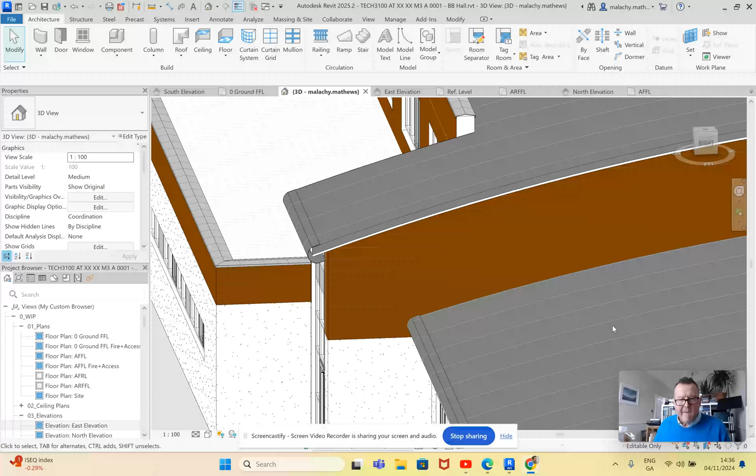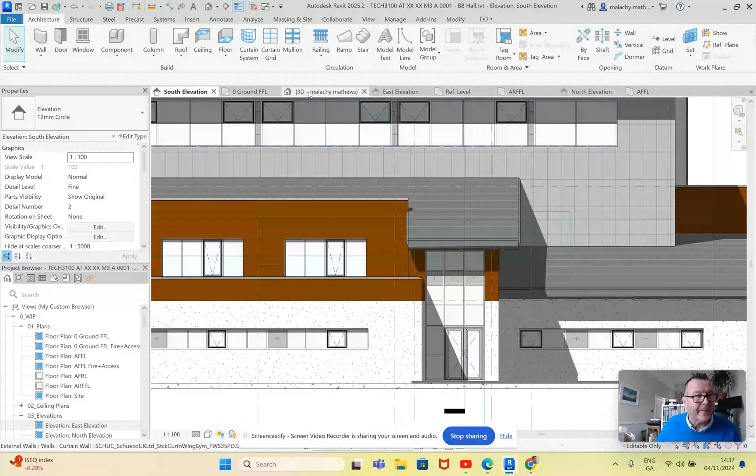So I talked about creating a circular fascia here. Now I'm not 100% convinced it's right, but it actually looks quite well on the south elevation. You get that kind of bump there, which I think is quite nice. And that's it there. Now I'm going to show you how I made that.

So I went in and created a new family using the metric profile template. Okay, let's see if we can get that rounded fascia. That's it there.

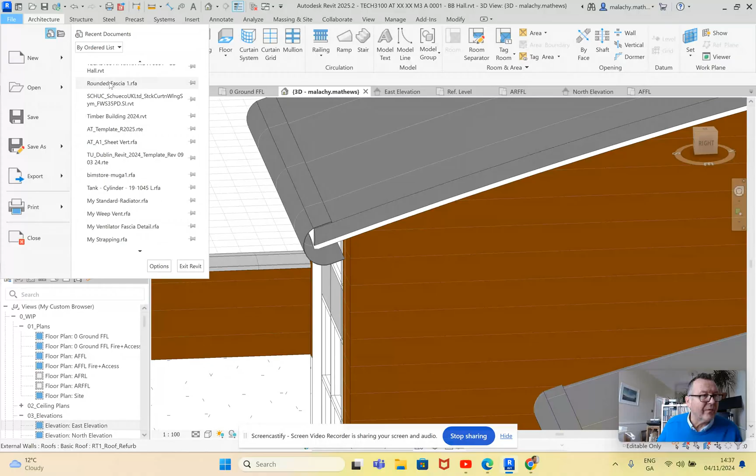So I use as my insertion point this, where the top of the roof is, that intersection there. So I kind of based it around that, drawing in that kind of shape there.

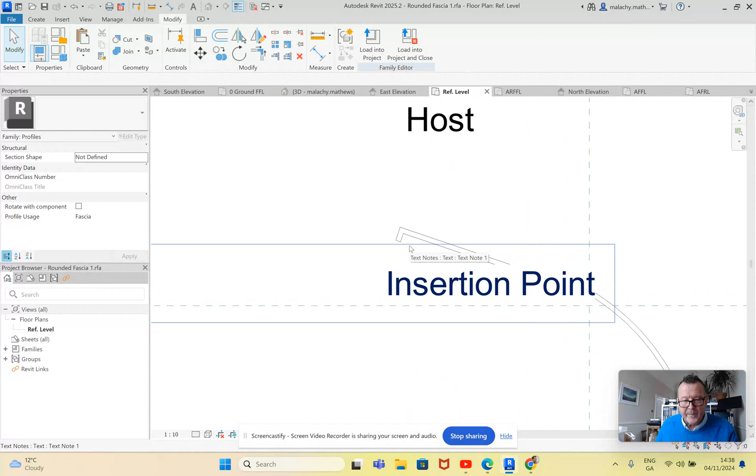And it has to be a polyline, so it has to start and finish. It can't be a single line, it's not like the roof extrusion. This one has to be a continuous line around, so that I've got a 5mm gap in between all of these here.

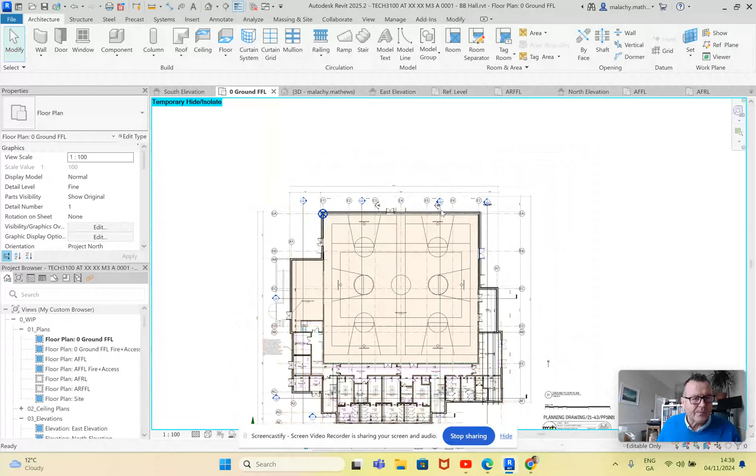And yeah, so how did I get that shape? I went into a section over here, and you can see in my green there, I kind of drew out the section first, and then got the rough shape that I wanted it to be.

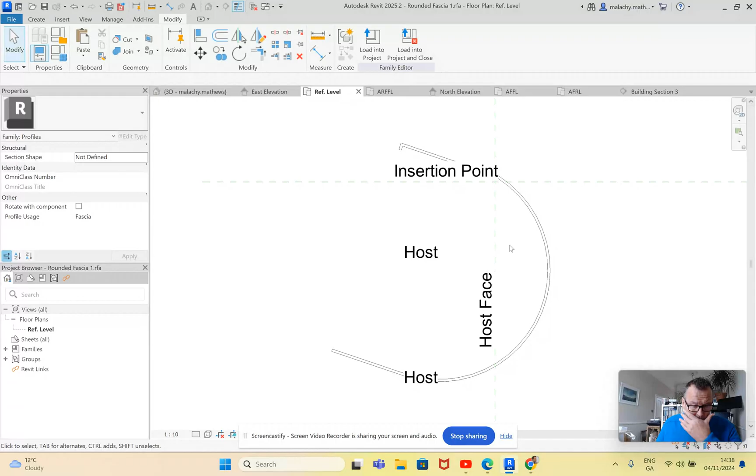I was able to cut and paste that line work into here. When I attached it first, it was the wrong way around, so I just came in and mirrored that. So that's the external, that's the internal, if you like.

The profile usage over here starts off with generic, but obviously I made it a fascia, so that it will be hosted by a roof as such.

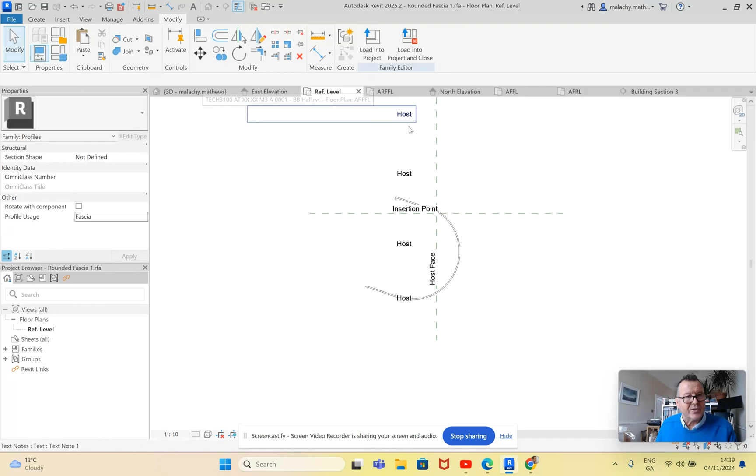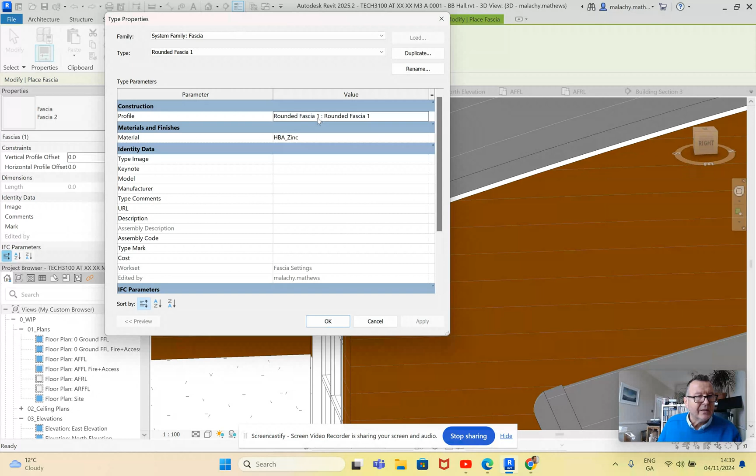Load that into the project, back into a 3D, and then you will go into roof and roof fascia, edit type, duplicate. I have this one already done, so there is the profile that I made. I've given it a zinc material, gone okay, and then it literally will attach as such to the side of the roof there.

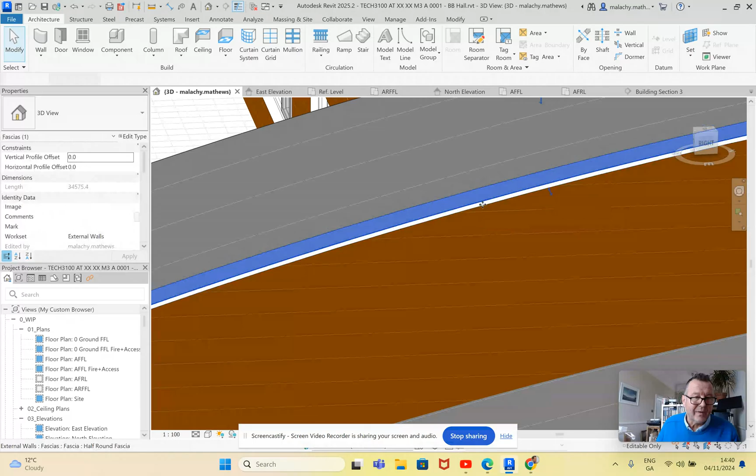Now where this kind of falls flat in one sense is that it does handle the curve all right, it handles that curve, but it's the junction here where it meets, because they're not on the same plane, they won't align and they won't join together. So I might have to go for plan B for that, but that's how I got that done.

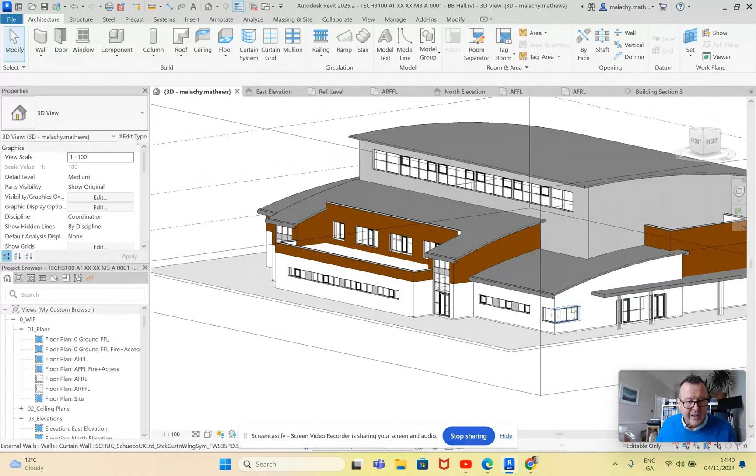So I'm just going to leave it there for the moment. I'll revisit it and see if I can get it a little bit better. I might even just make a couple of end plates here that'll stick onto the end, and use a flat fascia for the sides or something like that. But I just like the bump that gives the roof in terms of its aesthetic appeal.

Right now, I'm over the back of the building here. This is the north elevation, and you can see there's a canopy here. If you check your plans, you'll see there's a canopy running all the way around the back, supported by a trio of hollow steel sections, like so. There's a funny little wall here as well with a round opening or window in it too.

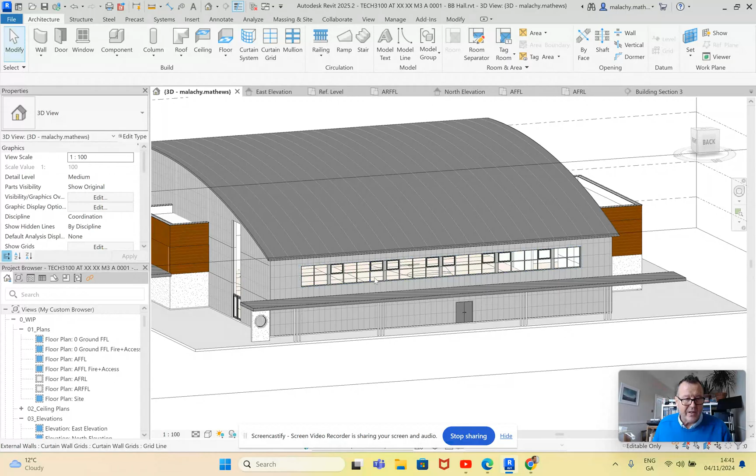Here is the window, so I've used the same technique as I used in the south elevation to create these ones here as well. Over on this elevation, the east elevation, you can see I've started to carve out using the same technique again, those long window opes there.

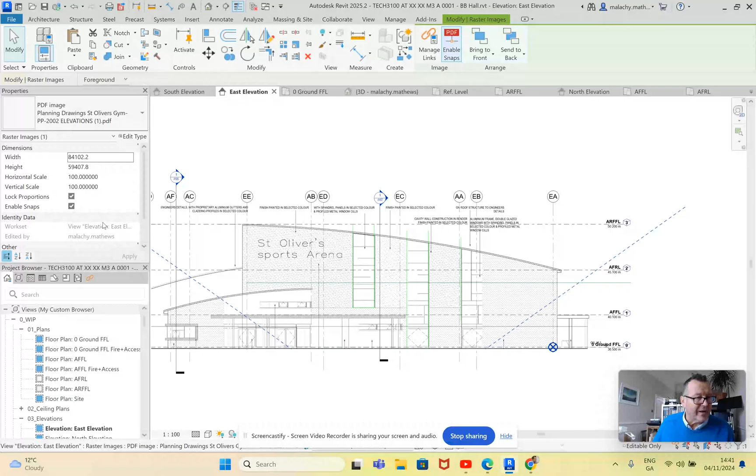So here is the east elevation as such, and this is just the PDF that I brought to the front. I'm going to move it now back to the background so I can see the model, and I used a couple of construction lines to make sure I was getting it roughly in the right place.

One thing the curtain wall will not do is form a mullion, a curved mullion down here. Now, it's Revit, so there probably is a solution out there for that. I don't have it at the moment, so I am cutting my wall short by dropping it into here.

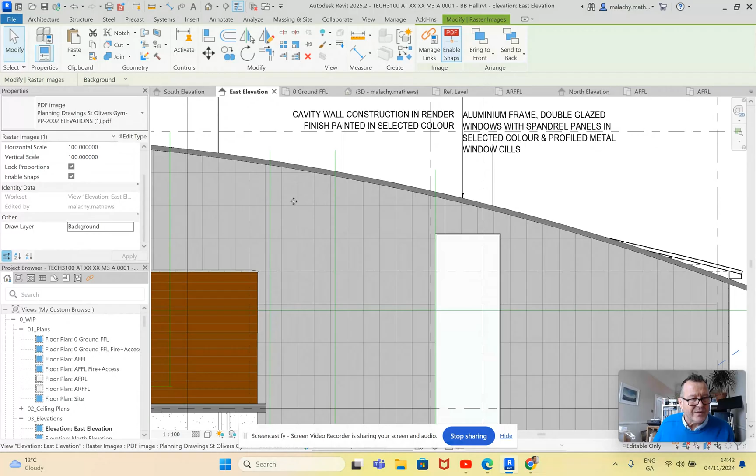This one I'll drop maybe into there, something like that as well, and the other one similarly. I'm just not going up to the roof there at the moment.

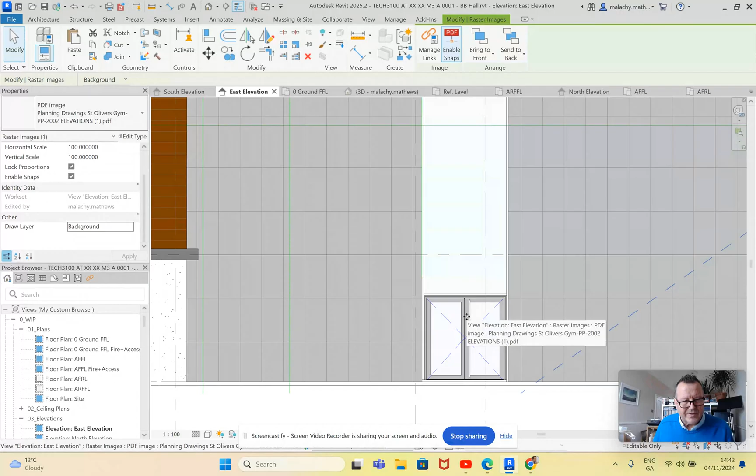I had a door set in there. I deleted it because, same as the escape doors in the front elevation, I just replaced a panel with a set of double doors there. I might go looking for another set of doors actually, I'm just not 100% convinced by these ones, but however, again, that's for another day.

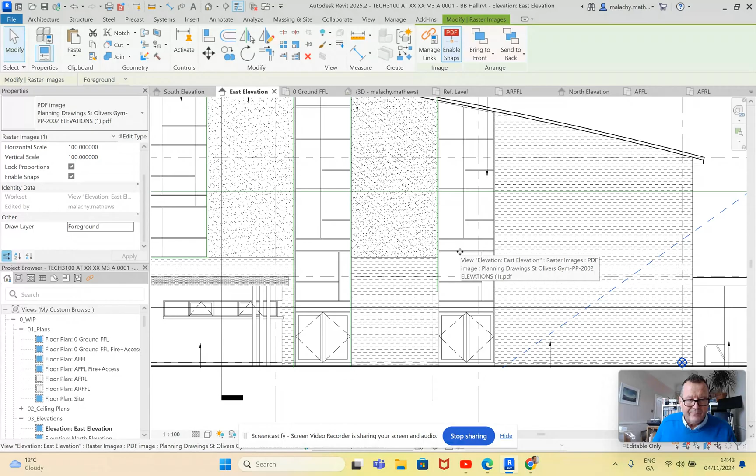Now, again, it's just a question of organising the mullions, whichever way you want to do that. If you remember, if I bring the PDF forward, you see the designer has kind of a funny arrangement of the various different mullions there to give it a bit of interest and whatever else. So if you want to replicate that, you can do that as well.

Now, so I'll use the same technique as I've done here for this one, and I'll use it for that one. What else have I got to do? Yeah, there's a few clerestory, high level windows here and up here.

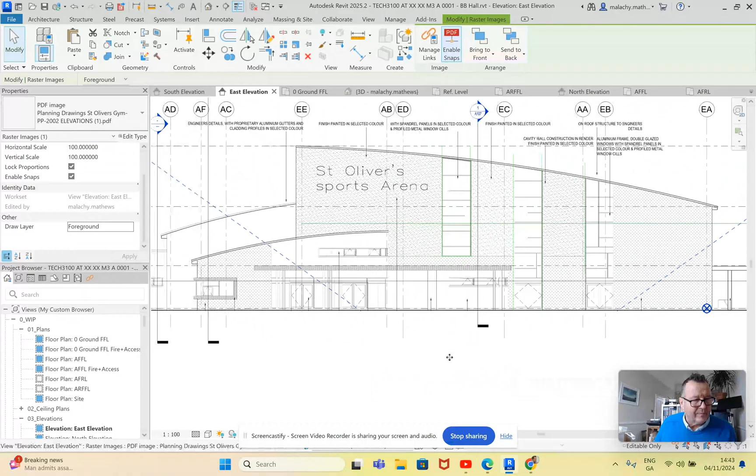I have that one in place. I don't have the surrounding of that in place at the moment. Okay, so let's go back into my 3D. So I'll put those in and these windows in here. I'll do an extrusion box out for that and cover it in zinc for that.

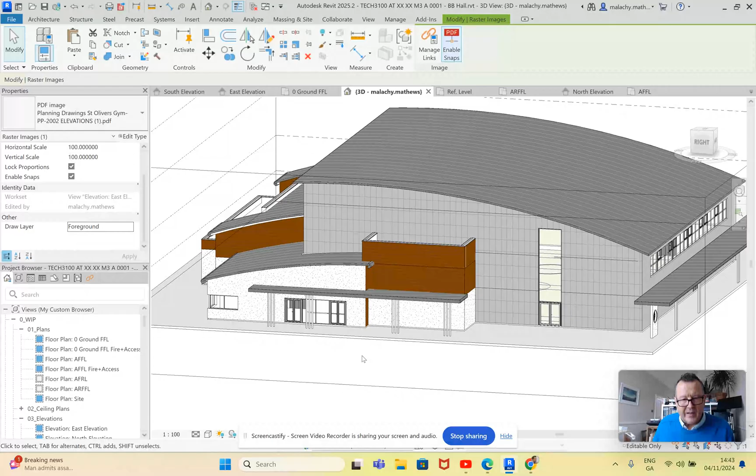And then I just need to go over and take a look at this elevation here, see what kind of windows are going on in there. But I think you've got all the techniques that you need in order to create all of those windows there. And then there's a ramp to go in here, so we might take a look at that in another video too.

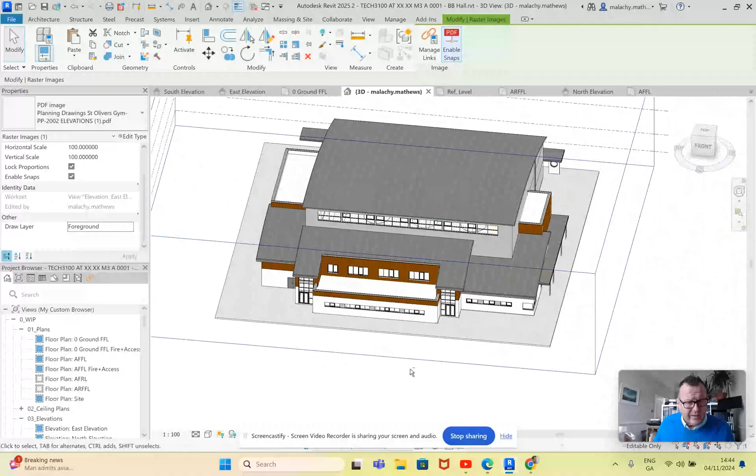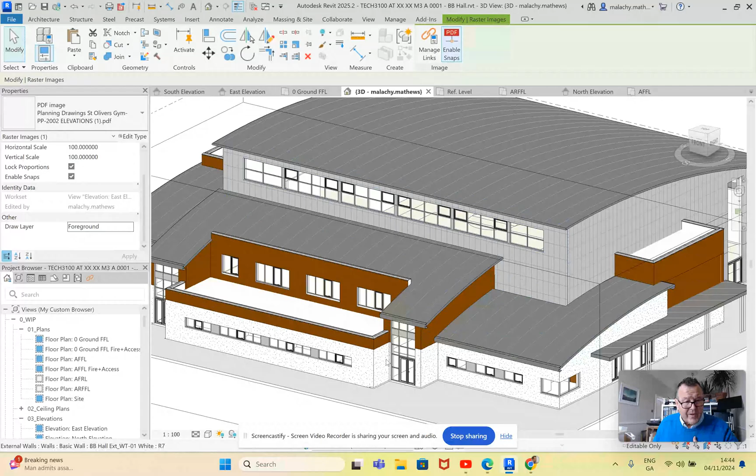All right, so we are getting there. You can see I've got my three materials now. I've got my rendered finish, my timber finish here, my laminated plastic timber finish, and then I put in a finish here of an aluminium panel as such. So I've literally just swapped out the wood for the aluminium, the render for the wood here. I'm using the exact same wall specification: CLT, highly insulated, with a counterbatten frame, and then a finish on it from there.